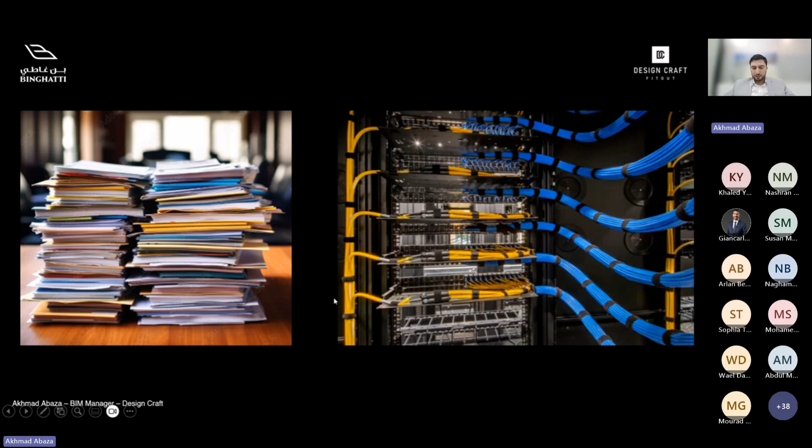So as we see here, there is a combination, and there is a battle, let's say, between the traditional way of paperwork and how the future is going through AI, through all of these things, that it will be data. There is one quote, commonly known right now, that data is the new oil. But if we didn't know how to use this data, this will also be a mess on us. So this is like developing how we are doing our workflows.

So we will define BIM as per our understanding. Many organizations have their own definitions - ISO has a definition, Autodesk has a definition, BSI, Wikipedia, etc. If you just click on Google, what is BIM, or what is the definition of BIM, we will have a lot of definitions in the market right now.

So I will just make it brief, based on my understanding and the understanding of most people working in this field. The acronym BIM itself is a shortcut for Building Information Modeling. We know and hear about it, but what it actually is: a 3D virtual representation of a structure or facility that may also contain embedded information about that structure and its components, to facilitate collaboration and information sharing. This is the most important thing - information sharing during planning, design, engineering, construction, operations, and maintenance phases.

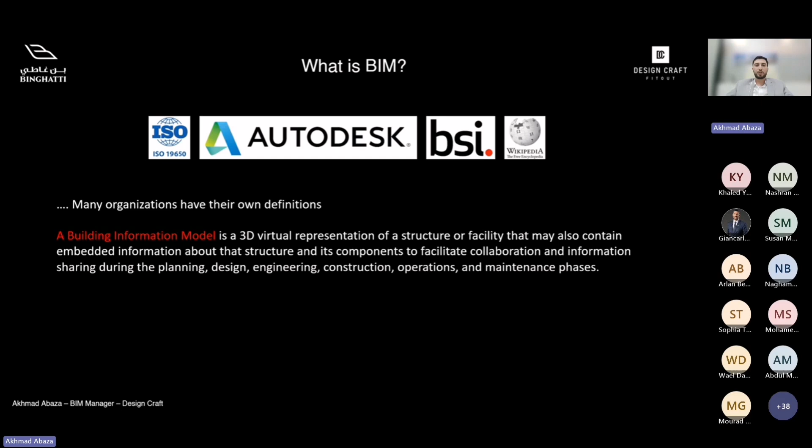So BIM is integrated in the full project life cycle, starting from the first initial concept that owners want, until we reach the maintenance phase that the owner also wants. So it's not just a methodology for only supporting engineering or only supporting design - no, it is supporting the full project life cycle. And we will speak about the benefit of using this methodology for all of these fields.

It's more about understanding each other, how we reach the information, how we share the information between each other. And in that way, we will, inshallah, be successful in delivering every project, since all of us here have expertise from all the fields, from the highest levels, plus 20 years of experience. This is all a good benefit to the BIM process, because BIM cannot stand alone and the BIM team doesn't work alone. The BIM team wants to be integrated in the full project life cycle. So for sure, all the expertise are a plus added in this workflow.

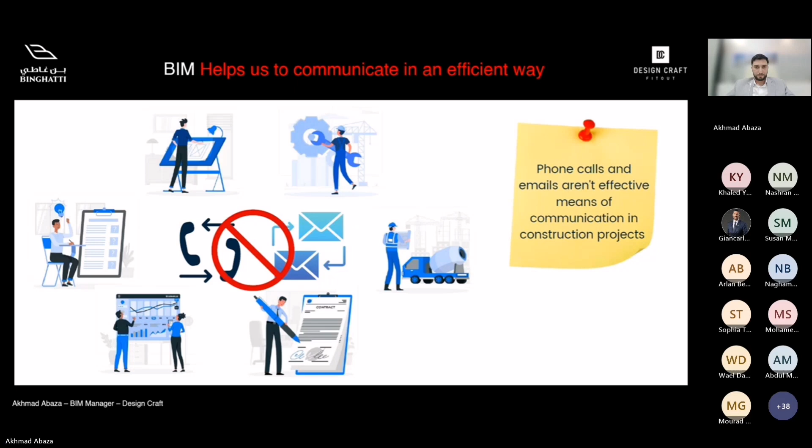On the one hand, we have the traditional way of sharing information. We have clients, project manager, architects, main contractor. All of us want to share information between each other. Just imagine how complicated this communication is. We need information from supplier, main contractor, we call supplier, send quotation, then there are a lot of things happening during the project life cycle.

So for that, once this digitalization started, now we hear about Google Drive, we hear about a lot of clouds that are a main platform for sharing information. On the other hand, we have an important definition to speak about today, which is the CDE, Common Data Environment. It is a platform that will be one source of information for all the parties, starting from clients and all the other parties. Everyone can reach the information that he wants through this common data environment. Just imagine how this becomes easier.

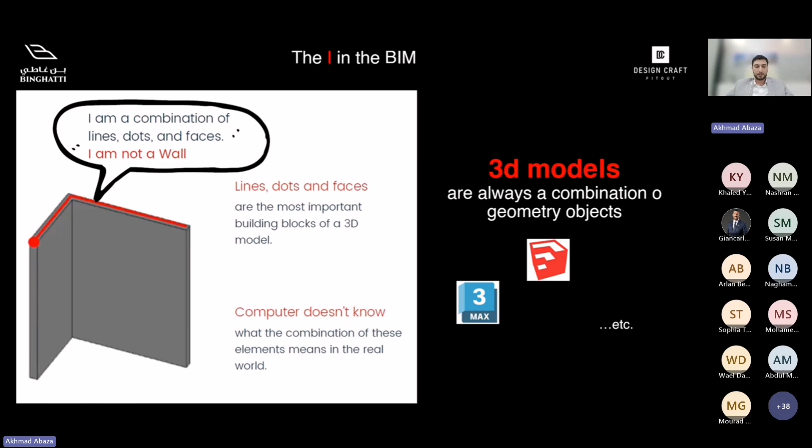However, in BIM models, the computer will understand what these elements are. It will understand that this is a wall, and it will also understand that this is a door. And this door will have a lot of properties and information. So if we go back to our point, the 'I' - this is the eye. The computer understands what this door is, what are the properties, and just imagine how this will be a benefit for the full workflow.

Once we manage this information and want to know each thing in the project, we will not deal with it as boxes, for example, as software. Let me make it simpler for understanding: we will understand it as a door. So we will make schedules for this door. This will help the estimation, this will help the architects, will help the suppliers, and will help the execution team for that object.

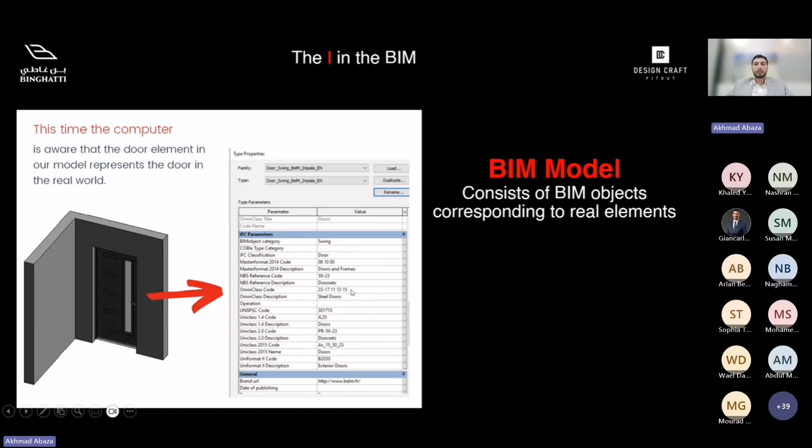So it corresponds to real elements. As I said previously, from this model we will have a construction drawing, we will have a quantity schedule, and the information of this object itself. That's why our main focus is on the 'I'. Once we are coordinating this information and we know what we are adding, we know what the output will be. So it means that it's about inputs to the model and outputs from the model.

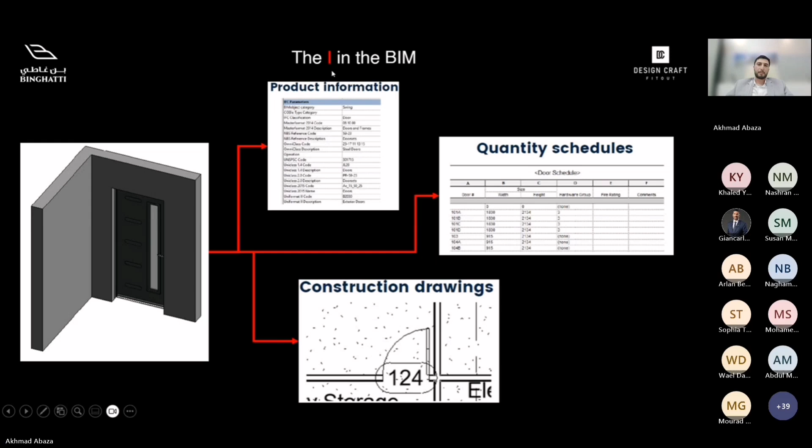I think everyone after the previous slide is asking who really adds this information to the model - who says I need this door, I need it oak, I need the subframe. It will be designers first, they add their information, and subcontractors who are specialists in this item will also add their information. The client has expectations of everything in the project, so he also has standards and processes. And project managers want to know their milestones - when each element will be manufactured, when it will be delivered, what is stopping all of this. So this information is all our responsibility as a team, not only the responsibility of one party.

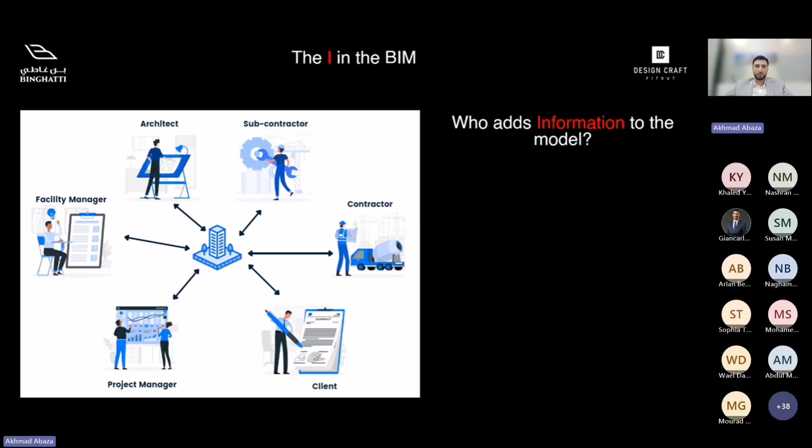It is very helpful. In this slide I am comparing two BIM models, two Revit models. They look very similar for us - if we see it with the eye, it's very similar. But if we take a deep look at the properties, we will see that this model has a lot of information. It is a door, there is a code for this door, and inshallah later on we will speak more about the meaning of IFC, COBie, NBS. We will keep that for later because it's more about the global standards of how we organize elements and information in Revit.

On the other hand, we see this model - it's a door and wall, but it doesn't have any information, only a type mark of 15. I think this is not useful at all, it's a waste of time and it has a lack of information. But the main question is how much information the model should contain, and it also depends on the requirement of the project and its goal. For example, we don't need all this information in project A, but we need it in project B. So before the start of any project, we want to know our goal from this model, what we want to take from it, how much effort we will spend, and who will get benefits as well.

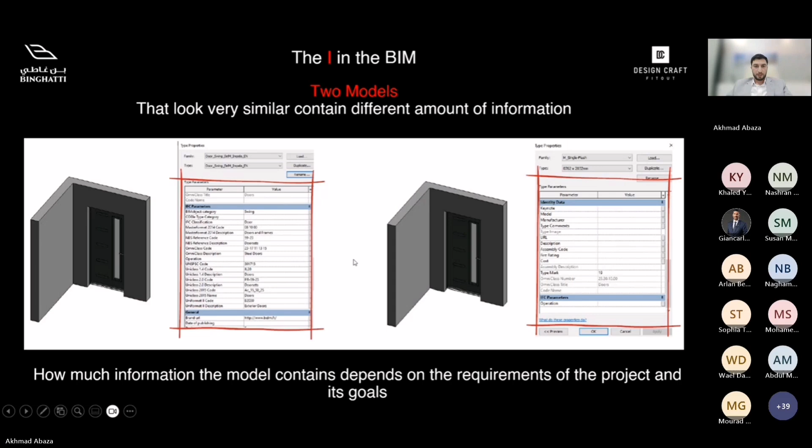There is also a well-known definition in the market that everyone hears about - BIM dimensions. What is this BIM dimension? Why do we hear sometimes 4D, 5D, all these things? I will not go deeply into explaining each one of them, I will just make an overview of what these dimensions are. I will start from 3D - we all know that 3D is the representation of a digital twin of the project, so it's about the modeling stage, about the model itself, what is the geometry and what is the information.

There is a step after it which we call 4D. It's more about linking these model elements into real-time schedules. For example, in the 4D stage we can do a time simulation of the building. Alhamdulillah, we had the chance to do this in one project five years ago - we did a simulation of the building respecting the milestones of the project, but unfortunately I cannot show it here right now because it was a government project and we are recording this discussion. Inshallah later on we will see what are the benefits of having 4D of the project.

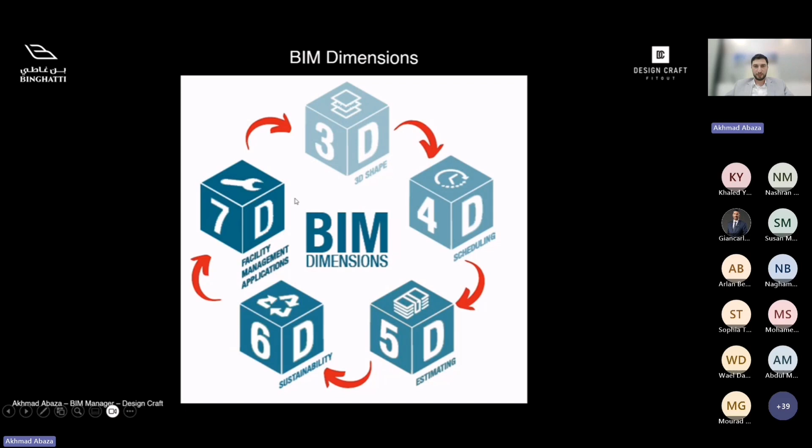This is an example of a workflow for this model. First of all, we start our 3D phase in model creation, using a couple of software to do these models. Then we start doing our 4D and coordination, scheduling, simulation using two software. We also have software for fabrication, then another example for our cost estimation software. There is also one well-known software for simulation, which is Synchro for planning. And as we said in the 6D, environmental analysis and sustainability. Finally, for asset planning, we have a software called dRofus, and this is also like a database for all the facility information.

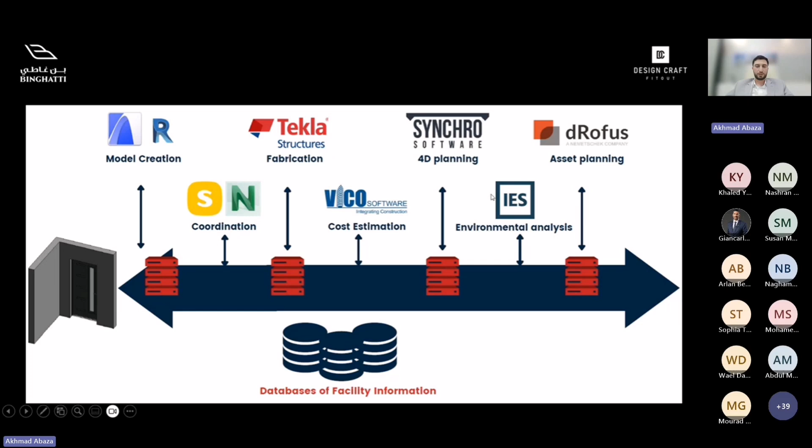Another thing to speak about today quickly, we hear every day 'LOD'. What is LOD? Level of what? What is this definition? We all facing, give me 200. No, this is not 200, 300.

There is a lot of discussion about this in the field right now. It represents a lot of acronyms: level of development, level of details, level of information, or level of model definition, level of information need. This is all serving the same goal, but it comes from different organizations and different global standards. So we just have to know what we want from this LOD: it's only to define and standardize how seriously we can take the information represented by a given BIM element at a point in the project lifecycle.

For example, this is a structural column, and this graphic explains how we want it in the model at each stage of the project. It's very important to understand that the BIM team starts from early stage with the design team, then we have the design development team, then the execution team. So in order to have a common language between all the specialist people, there is one standardized code so everyone can understand their responsibility at each stage.

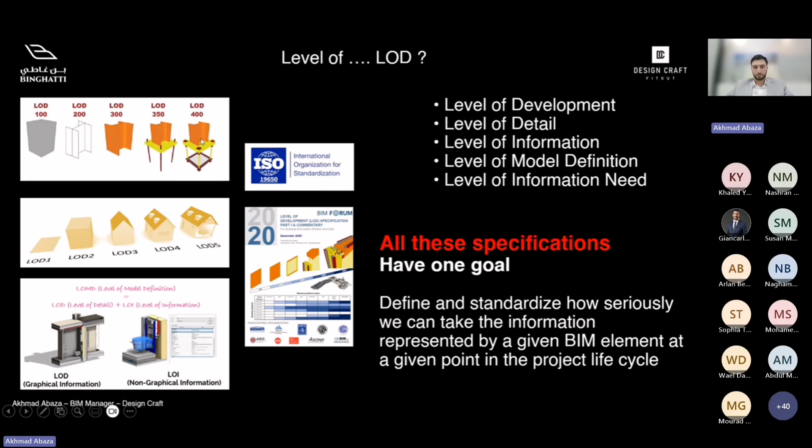This is an example just to clarify what LOD is. For example, here we have a door. It is in the preliminary stage, just lines, and we only know the location. Then in the next stage, the schematic stage, we add more information: the frame detail, the shutter detail, and all these main elements. This is still while we are speaking about the design team.

On the third stage, the detailed design stage, the design team has added all the information needed for construction. There is one stage before the 400, which we can call the tender stage or the IFC stage, as we all know it in the market right now. This always comes after the detailed design stage. Then our work as contractors starts after the 400 stage, which is ready for construction. Usually we receive models from the consultant after the 350 stage, which in common practice and normal projects is the tender stage.

Then we develop this model until it reaches 400. We add all the manufacturing details, construction details, termination details to reach the constructability of this object. And at the end, there is a stage called the as-built stage, where we put the element as it is constructed outside.

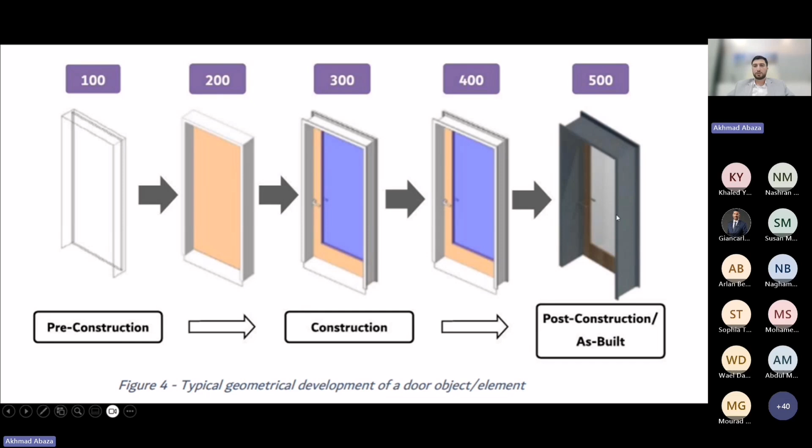I will not go deep into this chart, but I just want to give this idea. We know RIBA is the Royal Institute of British Architects, and they have, for example, this short, brief timeline of how a project started, from strategic definition until concept, spatial coordination, technical design, and handover. This is also the workflow of any project. The BIM workflow respects these stages and is integrated with each one of them, showing how the model should look in each stage, and what are the most important inputs for each party of the project at each stage.

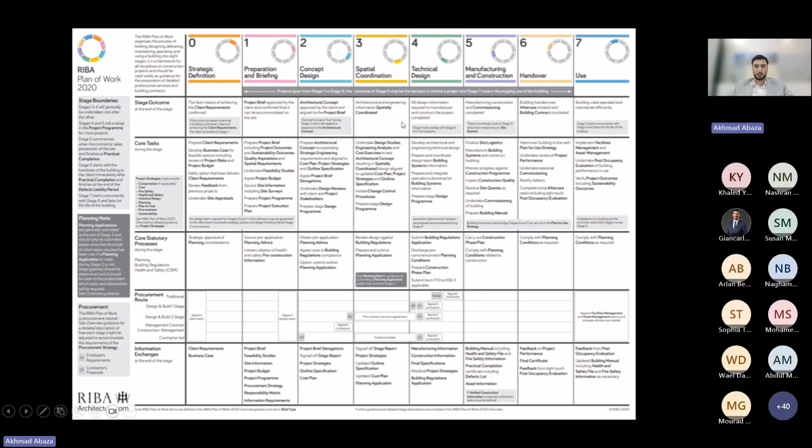Now we know that the standards are becoming worldwide. If we give an example of the best standards or best practices in the world right now, we can say Norway is very well advanced in doing BIM standards and utilizing BIM in their projects. But Dubai, as usual, is leading the future, developing a construction system to be smart, sustainable, and globally advanced. There is something right now, a platform under development, that will serve all the different disciplines: owners, developers, consultants, and contractors. This platform is an electronic system for construction to organize and simplify the journey of the projects.

If anyone is interested to go deep and understand what Dubai is doing right now with the Dubai building standard, I can show you an example of where we are right now. If we go to this website, we will see this is Built in Dubai. This is a platform.

Who is responsible for who can access this platform? Owners, consultants, and contractors. Each phase of this, for example, if we click the consultant, we will see what are his responsibilities in this life cycle. For example, here he will mention that this phase is for the owner. This is just a quick review.

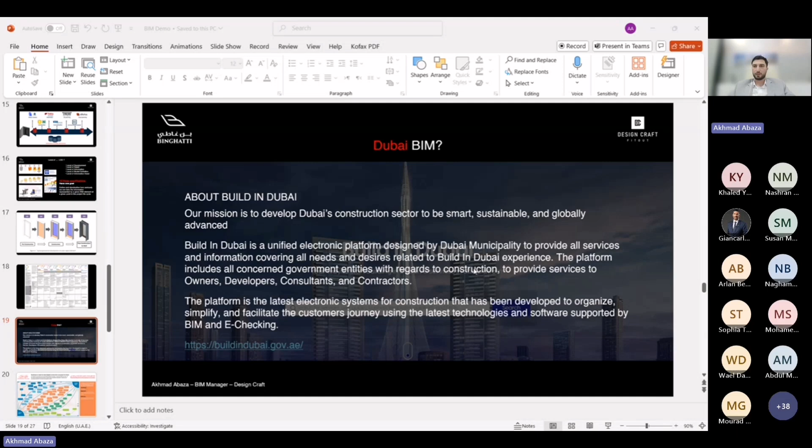As I mentioned before, thankfully, we had the chance in 2022 to be one of the teams that worked in a government project, which was the Dubai prosecution. We start integrating with the municipality on what are their vision, what are the expectations from what we are doing. We identify the goals of the BIM. We worked on BIM dimensions, and at that time the roadmap was before COVID. I think 2021, it was the deadline that all the submissions of consultants will be through this platform. But we all know the story after that. COVID started, and that delayed a lot of things.

If we see this, it's more complicated to explain right now, but it's about coding, it's about software, standardizing, common language. There is a lot of things that they are doing right now. And within, I think, a couple of years, it will be a must for all the projects, starting from owners, consultants, contractors—all of them have to reach this level of standards to be the future.

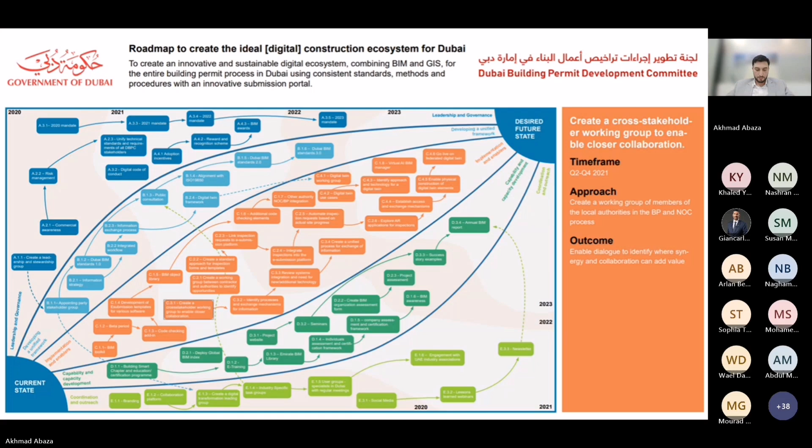There are, in my opinion, four important questions to ask. And for sure, we will not answer them today, but I want to keep these questions in your mind whenever we discuss anything. I will start with question number one: why are you creating models and information? Why did we decide to go for models? Why are we doing this thing? Why are we investing in this sector?

The second one is: what elements and data will be needed? How much data do we need to create? Do we have to add the ironmongeries to the model? Do we have to add all the aluminum profiles in the facade? Do we have to add the thresholds? All these questions we will discuss.

Not only us as a contractor, but it also has to be answered by the consultants and owners. How much is their expectation from the model?

And for me, the most important thing, since there are several teams working on projects, we have to identify who is responsible for this part of work. Who is responsible for the structure? What is the team? Who is responsible for the wooden cladding? Who is responsible for the piping, firefighting, and so on.

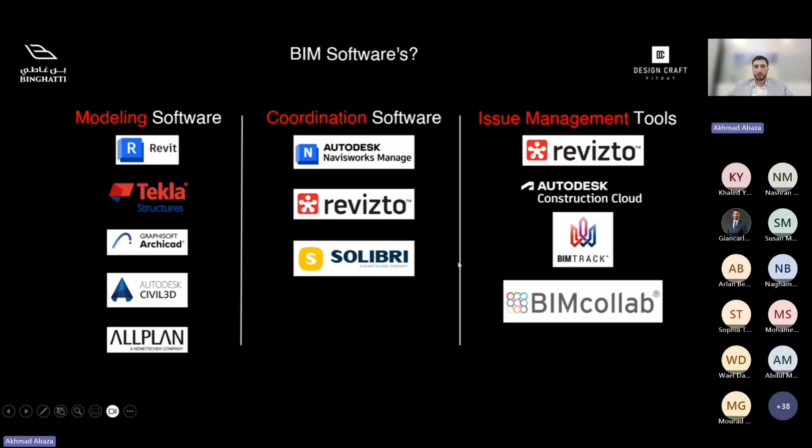This is an example of what is happening in the market right now. Now, let me speak about what we need in our workflow and what are the management guidance into this workflow.

As of now, we are using one modeling software, which is Revit. We are doing all the modeling part in this, starting from designers, then the main contractor developing, and from our side, as an ID fit-out, we are using Revit as the main modeling software. I think the GEC are using Tekla for the steel structure, but I didn't add it here because this is more focused on our workflow.

Once we create this model, we will merge the different disciplines in coordination with our other parties into two known softwares, Navisworks and Revizto, to do the coordination part of the project. Once we do that, we will send our clash reports into the issue management tools. As of now, we have Revizto as an issue management tool, and ACC also serves this purpose. Once these clash reports are assigned to people, there will be tasks for each one to rectify his part of work.

So it is like a cycle that starts from the model and ends in the model. It's all about modeling skills and communication also between all parties.

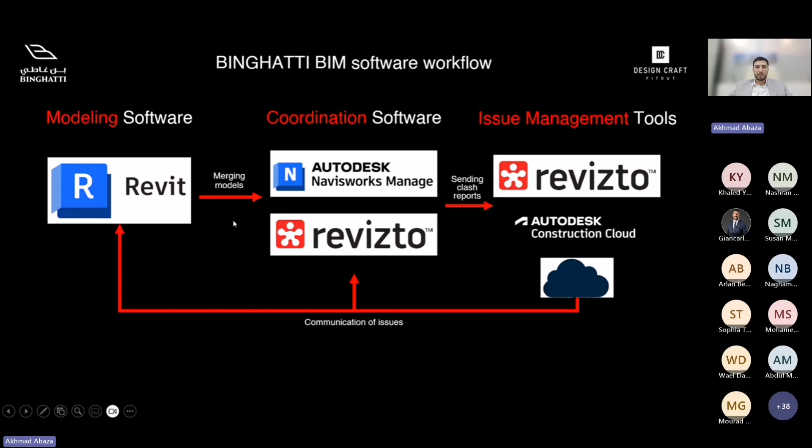I think based on what I explained here, and because of the Binghatti workflow, we have to learn another software, which is Revizto. I am studying the agenda right now, and I think it will be after two months. We will do a full training of Revizto for our whole team, because Revizto, I think, will be accessed by all directors and managers, and even anyone can reach information through Revizto.

But as of now, we are discussing with Silverstone and GEC how we will do all these processes. Once we receive a clear workflow from the management, inshallah, we will be transparent and crystal clear with everyone about how this workflow will be. I know it's hard to achieve this goal, but it is not a one-man show. It is help from everyone to do this, inshallah.